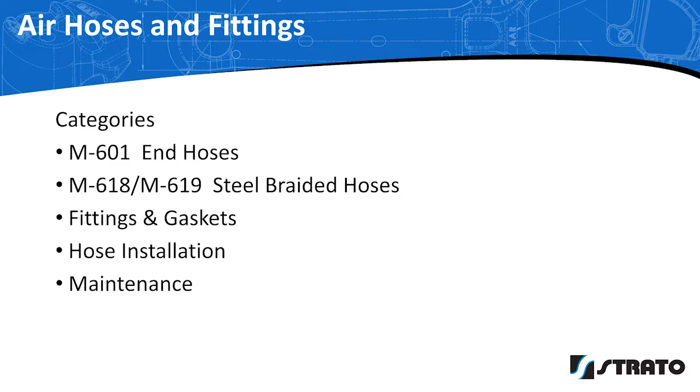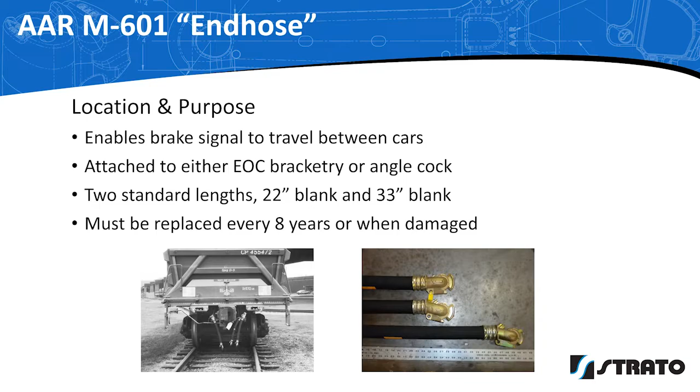The end hose connects the train line between two cars. It is critical that this hose is properly installed and maintained so the brake system is fully operational. Air hose separation is one of the largest causes of train delay.

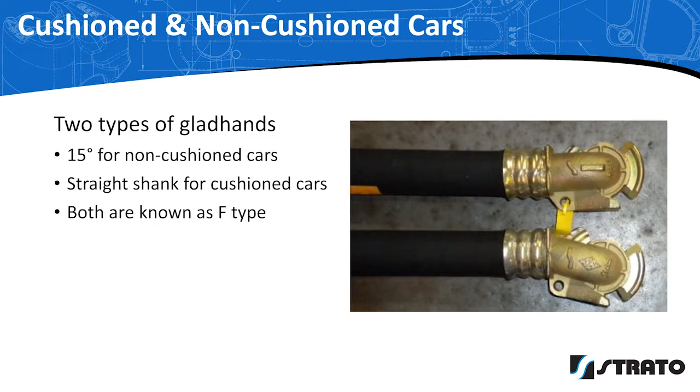The 15-degree glad hand is used on all non-cushioned cars. The straight shank end hose is used on cushioned cars because the hose attaches at a lower point. This allows glad hands to be fully engaged.

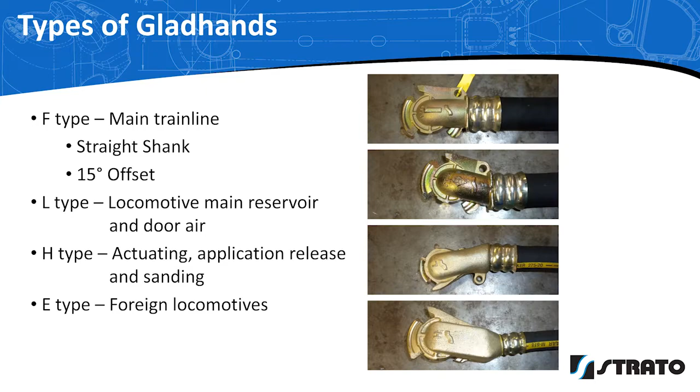There are four types of glad hands. First is the F-type, which we just reviewed, and it connects the main train line. The others are used on locomotives and special applications such as door air. The key reason for different types of glad hands is to prevent cross connections.

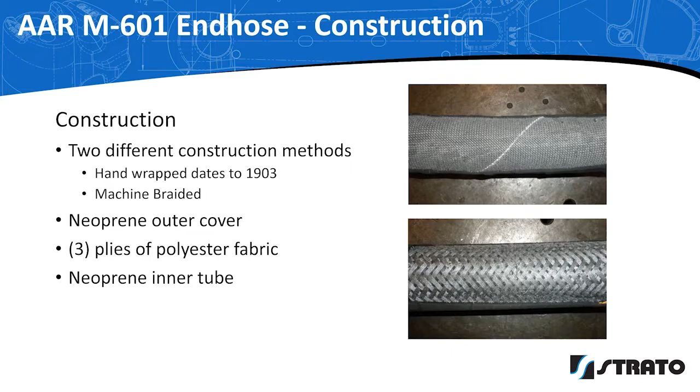The end hose can be constructed in two ways. Some are hand-wrapped, dating back to a process defined in the AAR specifications in 1903. Recently, machine-braided hoses were approved by the AAR, offering advantages in consistent quality and eliminating hose distortions that the hand-wrapped process generates. All end hoses must be AAR approved through a range of rigorous tests.

Some of the key tests are to ensure the hose maintains flexibility at cold temperatures, tested at -40 degrees, but also not be too flexible in warm temperatures where it might kink and block the airflow. Strato's AAR test lab is one of the few fully equipped facilities that can perform all AAR required hose tests.

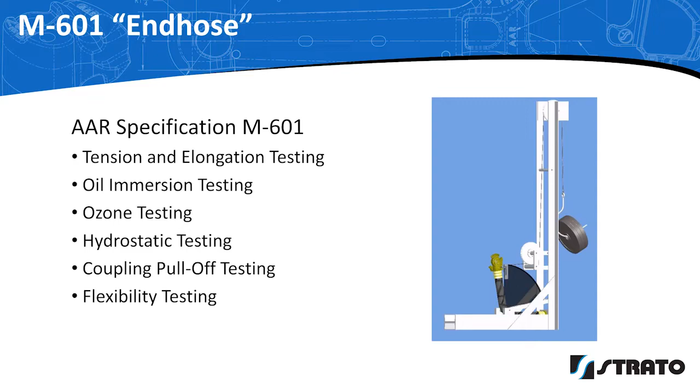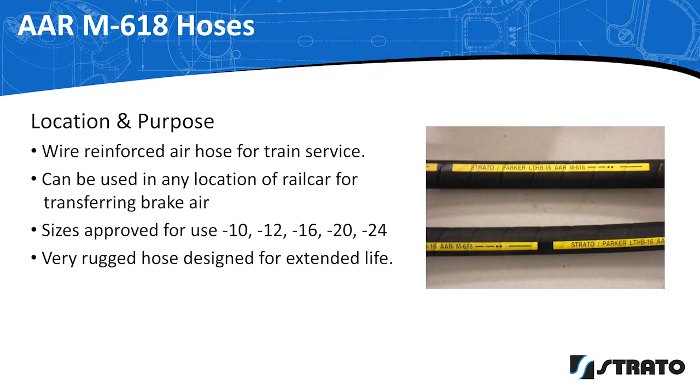The M618 hoses are used in a wide range of applications to transfer brake air. They come in a range of sizes to meet required airflow needs. The M618 hose is extremely tough and durable. It is required to be changed every 15 years as compared to the 8 years for the M601 end hose. It has steel braids to prevent kinking and provide extra strength.

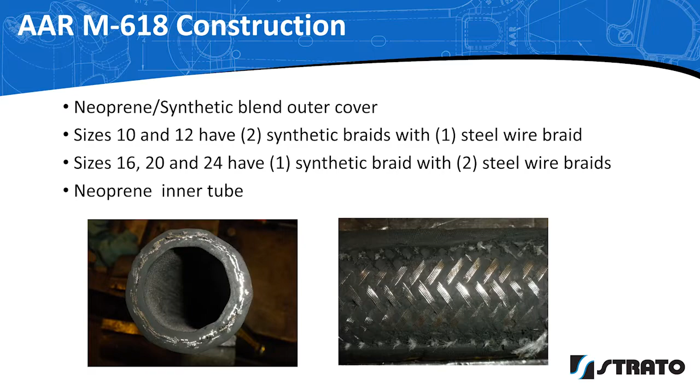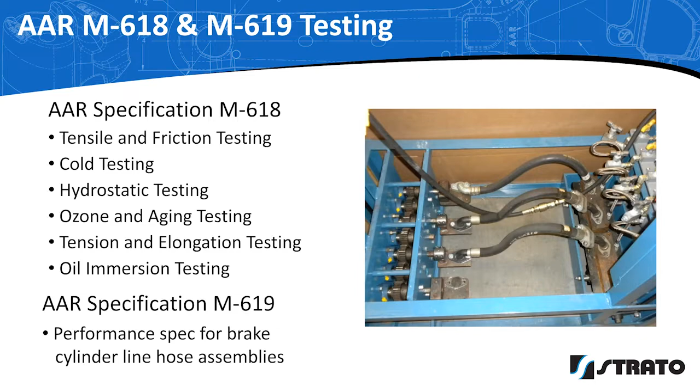M618 has its own testing requirements by the AAR. Hose assemblies used for brake cylinder line hose assemblies, also called truck-mounted brake hoses, have to pass an M619 performance spec in addition to the M618 testing.

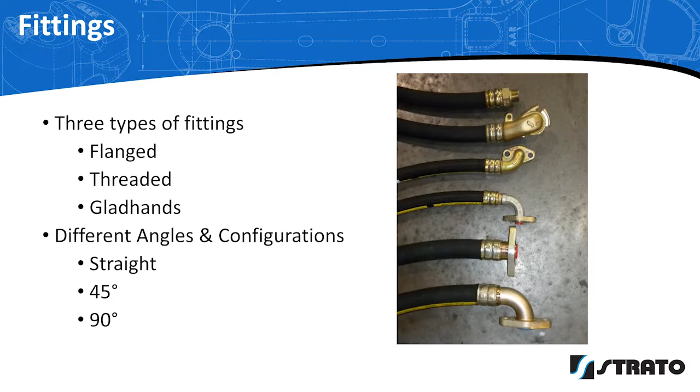Fittings used on hose assemblies make the connection between components. There are three types: flanged, threaded, and glad hands. They come in different angles to assure the best application and fit. Flanged is replacing threaded to reduce leakage.

Air pipe is used to transport air between components. Strato does not sell pipe, but we provide a full line of weld fittings, branch pipe tees, and pipe clamps. The AAR also has requirements for weld fittings and branch pipe tees to ensure air system integrity and maintainability.

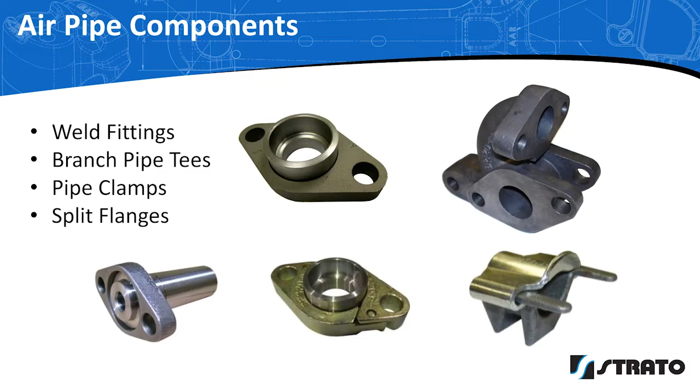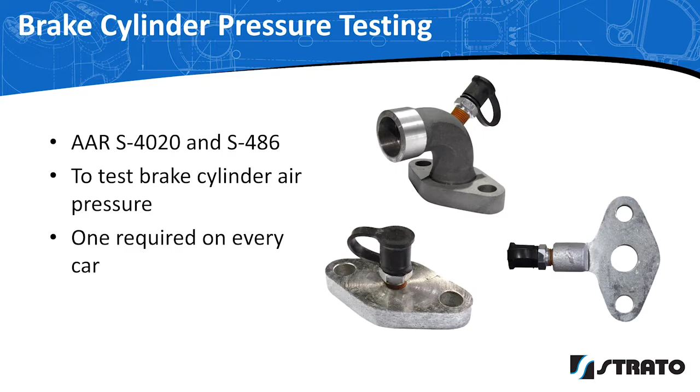Another AAR requirement to ensure braking integrity are test ports that are required on every car to test brake cylinder air pressure. The industry also has a wide range of specialty parts for specific applications.

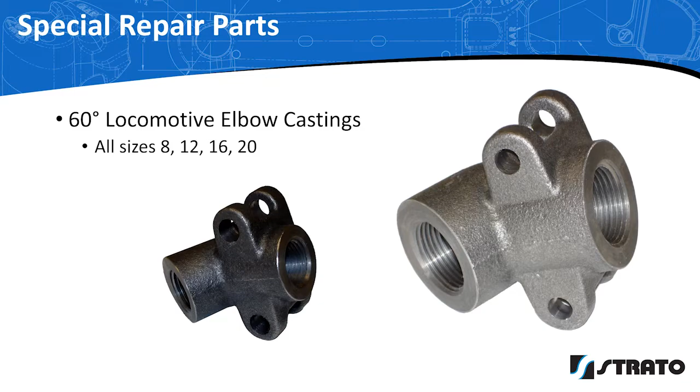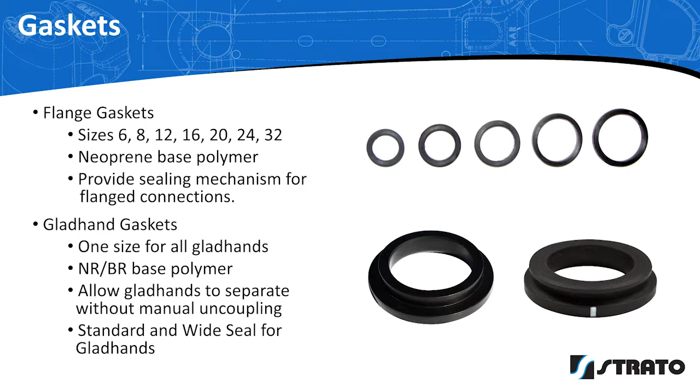One example would be the 60-degree locomotive elbow casting used to attach three types of glad hand hoses to the locomotive. Gaskets also have their own AAR requirements for manufacturing and performance. Gasket inventory should be rotated to manage the age of the gaskets.

Replacing damaged hoses is important to maintaining airflow and preventing train delays. A kinked hose, especially in an intermediate hose, is a visible sign that the internal steel braiding has been crushed and damaged, and the hose should be replaced.

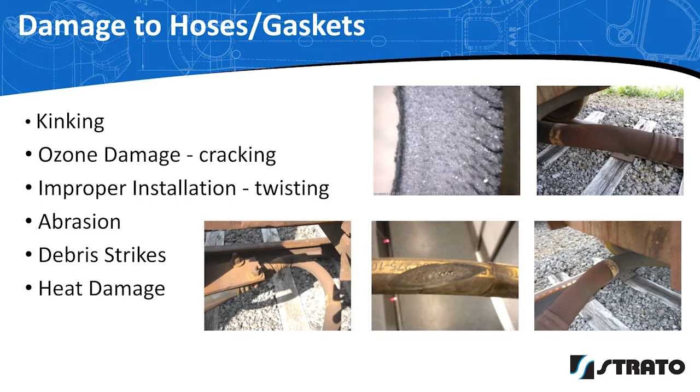Other damage can be seen in cracking, twisting, wear, and cuts to hoses. Heating sheds can also cause heat damage or burn hoses. Refer to Rule 5 in the field manual for detailed information.

The proper installation of a hose will vary with the type of hose, but is critical. Recently, train delays have been attributed to hoses kinking from improper installation. If you are unsure how to install a hose, ask for assistance or refer to the field manual, Rule 5.

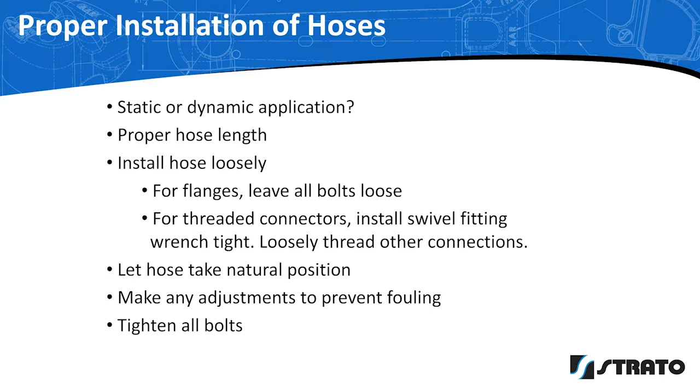A repair often overlooked in the field is replacing pipe with hose. The AAR has approved replacing pipe with hose for the air brake system for all lines except the main train line.

Repairing cracked and broken pipes can be difficult, requiring experienced labor to cut, bend, weld, and then heat relieve the pipe. Hose can be quickly installed in the yard without having to bring the car into a shop. Hose and fitting kits are available from stock to replace all pipes.

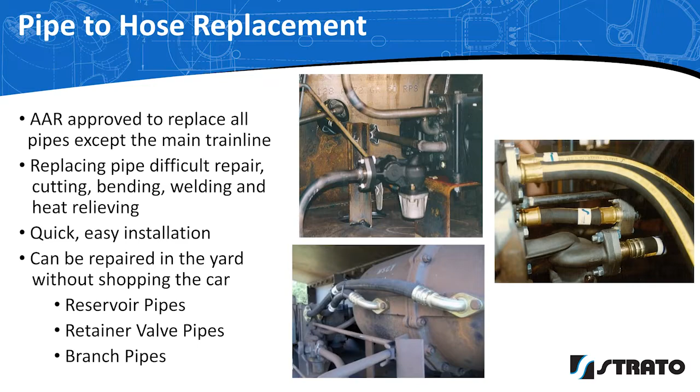Strato is dedicated to making safe, effective, and extended life components for cars and locomotives. To ensure that we meet the mission of our company, exceed the need, we will continue to expand our resources and increase our capabilities to serve the industry and our customers.